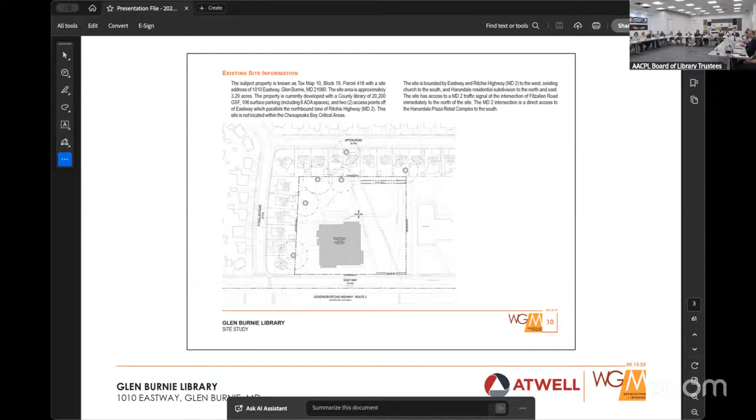We looked at the study at the time, which charged us with also looking at options that would include land acquisition to the north and the east. North is left on this page. Most of the exhibits you're going to see in this presentation have that orientation.

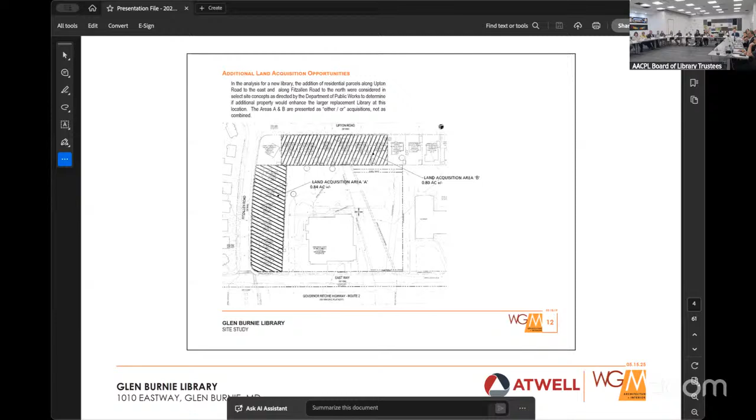We looked at things at that time such as zoning, existing easements on the site, environmental considerations, topography, and parking. At the time this study was initially done, it was for a 32,000 square foot library, so most of the schemes you're going to see, I'll only show two, had 120 parking spots, which was the required parking for that 32,000 square foot library.

There were a number of schemes generated at that time, I believe six. Two went forward as the preferred options: one which maintained the existing lot lines with no land acquisition, and another which included land acquisition to the north, letting the site flex a little bit.

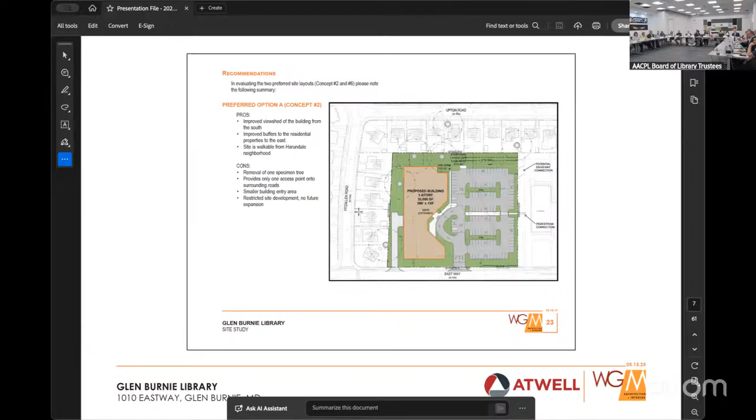You'll notice in both of these schemes something germane to the project we're working on now: the library's preference for anything under 40,000 square feet is a one-story building for operational efficiencies. In both schemes we were at 32,000 square feet with 120 parking spots, we generally filled the site, though we were able to have a little more flex and green space, again on one level.

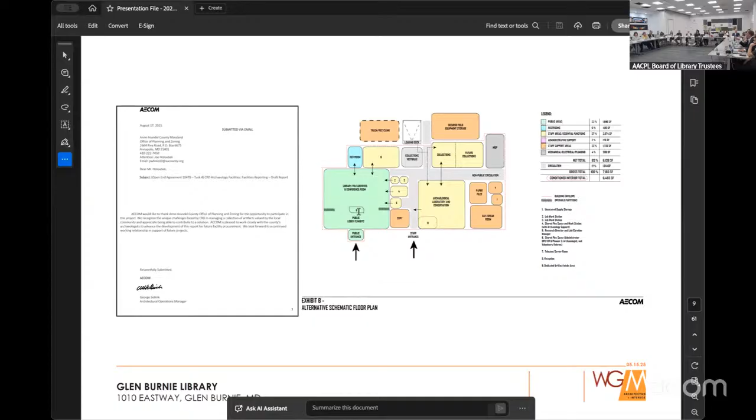The study was completed and a subsequent study was done, not by us but by AECOM in 2021, for the county's Cultural Resources and Archaeology Department. They are housed in a number of different locations around the county and were looking to consolidate operations into one place. That study wasn't so much site-specific, it was more a programming study understanding their space requirements.

We were subsequently asked in 2022, the county merged these two capital projects, the Cultural Resources project and the Library project, and said there are some synergies here, these would be good potential cohabitants in a new facility. So we were asked to update the study, with the stipulation this time that there would be no potential land acquisition to the north or east.

We're going to add 8,000 square feet of cultural resources to the project, and update the parking count, which now goes from 120 to 150 based on that additional 8,000 square feet. You remember from the older site study it was pretty packed to begin with. At this point we knew the footprint couldn't even be 32,000 square feet because we were adding additional parking.

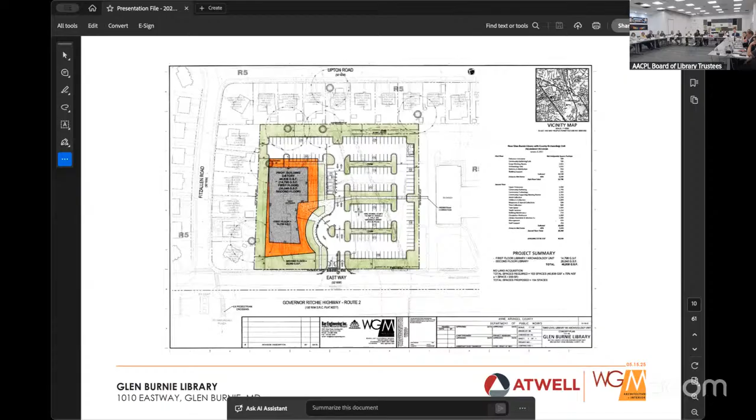So we had to look at a multi-story scheme at this point. We had an early programmatic breakdown just to test fit the size of the floor plates. This scheme showed a lower level smaller than the upper level, so the upper level would kind of cantilever or overhang over the site, for a total building of 40,000 square feet.

In late 2023, the county advertised a public open solicitation for an architectural team to design the new Glen Burnie Library. We put together the same team that performed the design for Annapolis: ourselves, Wheeler Goodman Masek, and Bay Engineering, who has subsequently been bought by Atwell, you'll see Atwell on this. They're a local civil engineering firm.

Louis Cherry Architecture out of North Carolina does fabulous library design, and Margaret Sullivan Studios out of New York City is the preeminent library programmer and interior designer in the country, working all over the country. We were happy to bring that same team back together. After a selection process, we were awarded the job in late 2024 and got to work on it.

So the rest of the presentation is what has happened basically here in 2025. The pace of the project has picked up significantly now that we're fully under design. One of the things very important, part of the solicitation, was a programming effort soliciting input from the Glen Burnie community. They love their library and library staff, and have strong ideas about what they want. It's really just our job to create a wrapper to incorporate all the wonderful things they do in that building.

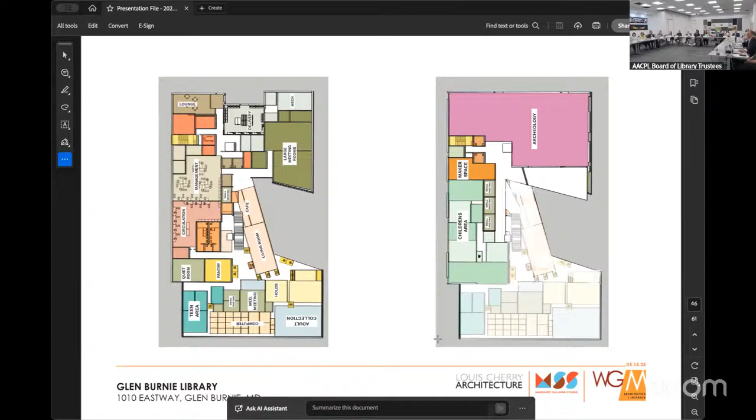Continuing to push the site plan, whenever you're designing, there are these moments where you try something and it clicks at the same time. We've been moving this building around, looking at different program, and the inside and outside of the building. This was a big point when these came together.

It was a subtle move, but we pushed the building farther to the east, which put a bank of parking right here, and essentially at the same time flipped the interior of the building where the service and distribution was happening, which also flipped where archaeology was happening. That kind of unlocked a lot of things.

So we no longer had to try to force, if you think of some of the earlier site plans, a drive aisle back here. The northeast corner of the site, which right now contains the bulk of the specimen trees, is a sort of open area of the site, and it became something we wanted to incorporate and draw into the building. There's not a ton of opportunity on this site based on the size to have that inside-out interaction, and that became a place where that could happen.

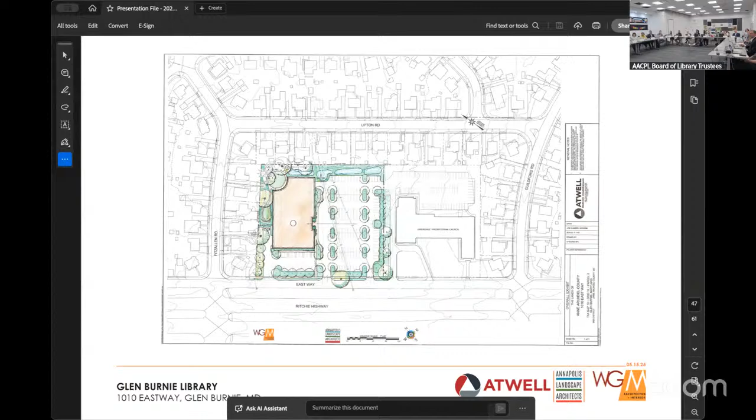On the inside of the building, this is what I was describing. So that building kind of flopped from what you saw in the earlier schemes. Archaeology is now on the second floor on the Eastway facade, with the adult collections up here. In this early scheme, the staff bar was running all along the north side of the building. Children's area was down on the west side, closest to Eastway, with a programming room. But moving that archaeology and service and distribution was a big move that has stayed through this piece.

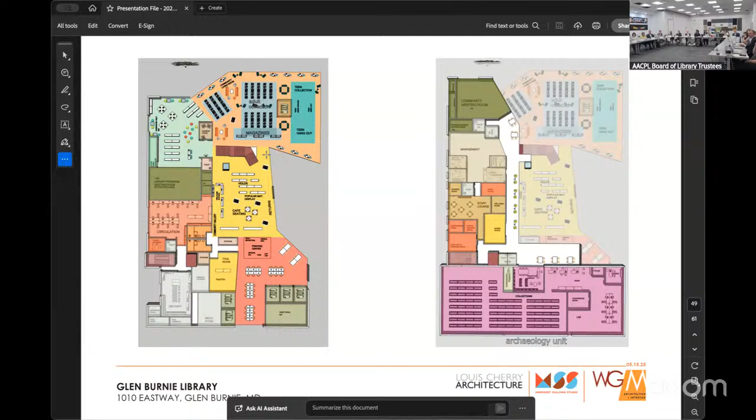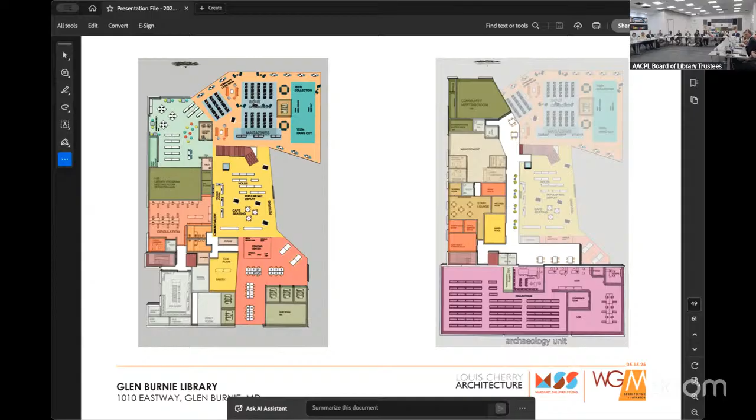The next move, this is again going back and forth with staff and with Wanda and Ashley and their team getting feedback. If you remember those adjacency diagrams, there was a discussion about really trying to get the children's area close to an outdoor amenity. So that flipped the children's area from down here to up here, with the children's programming room, adult collection, and teen space. Did teens make it here yet? They eventually made it here, if I give it away.

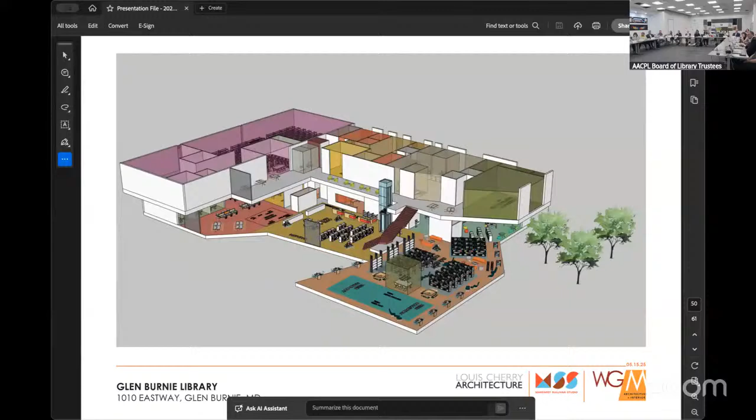Here's starting to look at an isometric of how those two floor plates work together. There's no exterior skin on this building yet, so you're not looking at the outside of the building. But you've got the second floor plate here, and the first floor plate with a lot of those large areas open to below, and some kind of monumental stair and elevator connecting those two levels. Children's area is tucked underneath that second floor, with staff areas along that side.

Here's the first floor with the second floor pulled off. Service, distribution, mechanical, everything is over in this corner. And then here's the second floor placed on top of that.

The site plan is a constant back and forth. It's an iterative process where as you're testing these designs against each other, the site plan takes that updated building footprint, what was shown at the time, starts to morph to that, continues to develop and start to get different layers of regulatory things that are required in terms of stormwater management, et cetera.

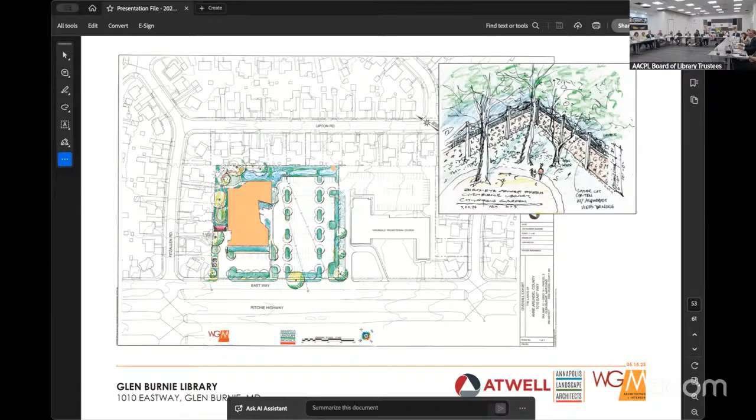Most recently, what we've been looking at is that most of these major programmatic pieces, in terms of their general place within the building, seem to be pretty set. They feel pretty good. It feels like we have buy-in from the staff and from the library team. Everything seems to be working.

Some slight tweaks to that isometric you saw before. One tweak happened here, again with staff feedback on the earlier version: the children's programming room, a large meeting room primarily dedicated to children's programs, was on the other side, butted up to the exterior wall. These two elements were flip-flopped, so the children's area got moved closer and now opens to that outdoor area, allowing for indoor-outdoor type experiences.

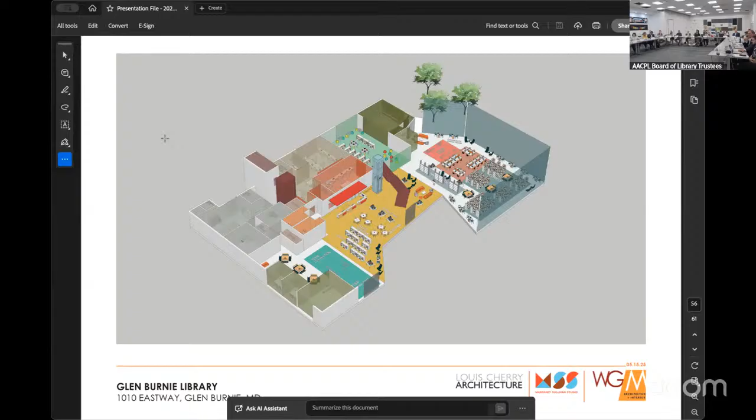Here's the first floor with the second floor removed. Now the second floor on, and you can see these spaces starting to crystallize more and more. We check back against that enumerated program document you saw, and check the updates. This is the most current site plan based on the current building shape and form, continuing to push layers of detail into this.

There is a grade. The Glen Burnie Library site has a pretty significant grade differential that needs to be made up. The driving grade is the grade out at Eastway, which is essentially the first floor elevation. So by the time you get to the back of the site, there's a pretty significant grade differential. The latest piece we've been developing, as the landscape architect looks at it, is this programming area opening to an amphitheater-type series of steps leading down to that outdoor area. You also need accessibility ramping heading down on the east side of the building to bring you down to that lower grade.

Here are the floor plans as they currently exist. North is at the top of the page. On the northwest corner you have delivery and distribution, the primary service functions like mechanical room, electrical room, and immediately off of that, the primary staff area. Moving east, children's space, the program room opening to that outdoor area, and the children's collection. Then the computer area breaks up children's and adult collection. The entrance atrium will have a lot of different holds, popular materials, etc. There's a welcome desk and second floor access there. Teen space, a cafe adjacent to the entry, smaller collaboration rooms, a quiet room, and public restrooms.

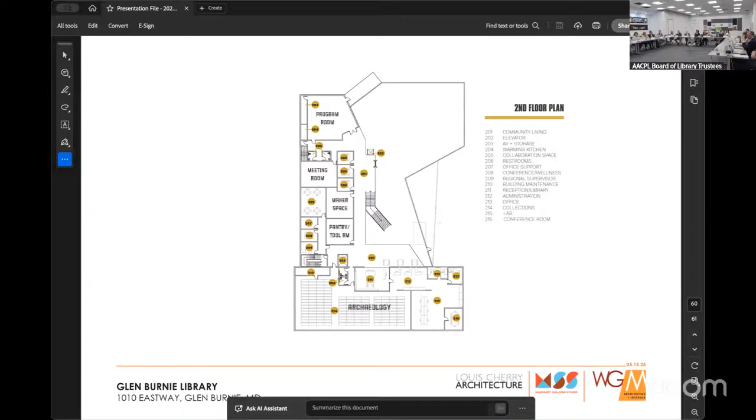There is an elevator. In a lot of these, it's kind of rendered as this glass tube right now, and we're figuring out where that goes. One of this series of investigations is really looking at where those vertical connection points go, so that when someone enters the library, they are both oriented horizontally as well as vertically.

And are there restrooms on both floors? The primary public restrooms would be on the lower level. So there's no second floor bathrooms for people with disabilities? So there are second floor restrooms.

Operationally, that's something that we have to have continued discussions with the staff about how much access will be given to those, because monitoring the entrance to the restrooms is something that's important.

I'm concerned about seniors, meaning people over 55. And I'm also concerned about teens, because I work with teens. I work with Teen Connect, and I know some library branches are working very hard to create safe places for teens. If this particular library wants to do that and have programs for teens after the library closes, can they accommodate that safely in this open space? Because I'm part of Teen Connect, I just want to make sure.

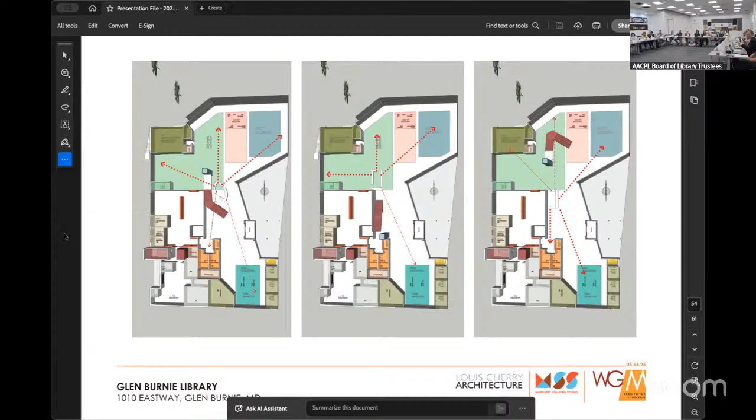100%. And so from a teen standpoint, all of these schemes have very intentional teen programmed space, which in a lot of the older branches - not the current ones you're designing - the teen space ends up having to be grabbed from somewhere else. But now it's programmed and it's designed into the building.

When you talk about after-hours use, the library staff can address that more directly, but I believe they do programs like that now in the current library. The way this building is set up, it is not set up such that there would be areas of the building that you would lock down and only have access to this area in off hours. That's not how it's set up. I don't think that precludes them from using it for teen lock-ins or things like that, and certainly there would be a dedicated area for that, but it's not like this area is going to be physically separated or secured from the remainder.

And I just have one last question. Did you say they were going to have a tool library like the one in Elkridge in Howard County? Did you say that, or did I misunderstand you? No, I did say one of the things that came up as a very strong ask was a tool library. I'm not 100% familiar with the Elkridge one, but this would be a type of place.

A food pantry, we knew was a long-standing request. But what came out in this programming session was a tool library, where people could check out different types of tools and also obtain training in how to use those tools. So that's a space that is - do we have that in Anne Arundel County at all? I don't know the answer to that. No, we don't. Elkridge has a very nice program in Howard County.

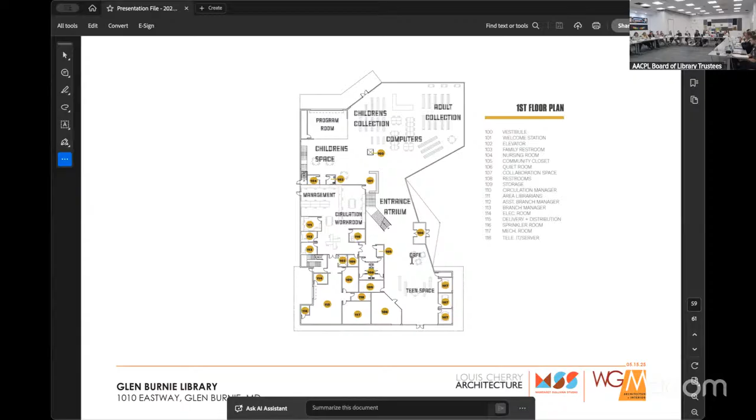Is the parking lot water permeable, or are they going to use something else? So we've been talking about different surface types in the parking lot, what that's gonna be. I think there are going to be multiple surface treatments, probably something different for the drive aisles as opposed to the parking stalls. We've talked about permeable pavement maybe for the parking stalls, but there are a lot of things that come into play from that standpoint.

So another layer that gets added in right now is we bring in the engineering teams to give some preliminary narrative input, the structural team, the MEP team. It depends on what type of mechanical system we use here. If geothermal is something that's considered here, for example, we'd certainly explore it. So if geothermal gets used...

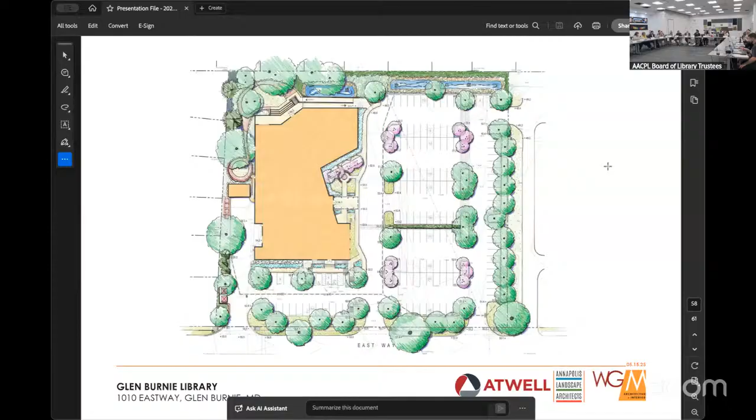Let's go on to the consent agenda. We've got two items there: the motion to approve the FY24 IRS 990, and the motion to approve the sole source and purchases over $100,000.